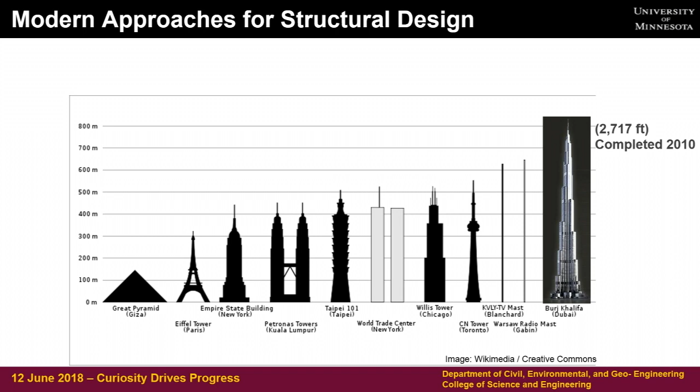And so when you look at these structures and you think about engineers, to go from these structures to this one, which is mammoth, how do you push those limits and make sure that you're going to have a safe and serviceable structure? This actually is a view from the top tower of that building, so you can get a perspective of what it's like to look down. What's coming next, though, is the Jeddah Tower. It was called the Kingdom Tower. It's in the process of being constructed.

And what's interesting is one of my former graduate students worked on the Burj Khalifa. And there were very few people who knew how tall that building was as you're working on it, because as soon as that gets out, somebody's already designing the next building to surpass it. So it was going to be a mile-high building, and the ground couldn't quite sustain that, so they're shooting for a kilometer-high building. And it's not just challenging for structural engineers, but think of the mechanical engineers, elevators, water in those structures as well.

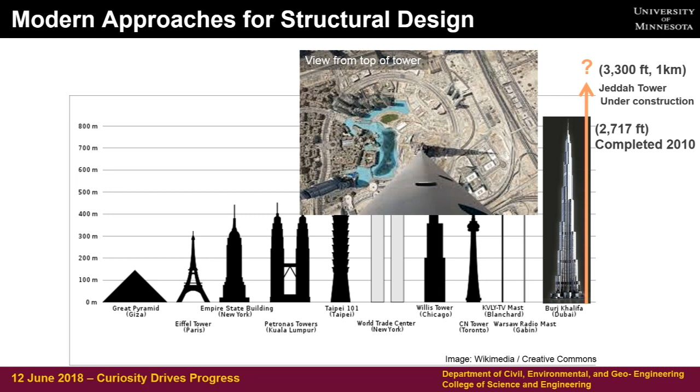So anyways, what are the modern approaches to structural engineering? These are some of the major categories. One is past experience. So we have some successful projects, learn from those. Another is to do structural and material testing. Another is to develop models, most of which we have validated with experiments. So let's look at past experience. Sometimes that doesn't work out so well. Many of you who've had physics have seen this video before.

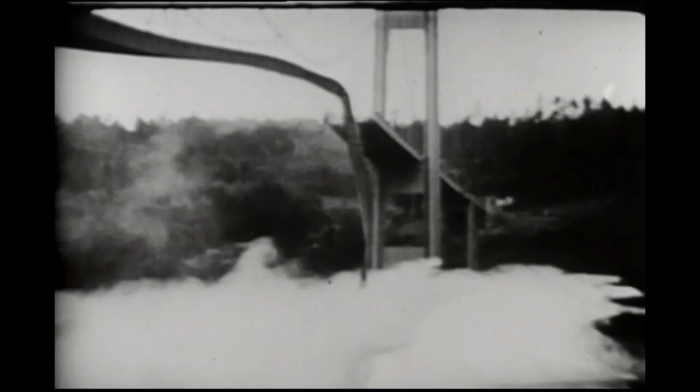But in 1940, this structure was built. It was nicknamed Galloping Gertie by those who were constructing it, and it lasted for 4 months. In a large windstorm, it excited the structure through flutter, and you can see this failure of that structural system. At that time, they were thinking of gravity loads, that you can have a long suspension span and have a very light deck. The girder depths were about 8 feet deep at that time. And you can see it was very flexible. They pushed the limits from what they learned, and it wasn't successful.

In fact, 10 years after this failed... the Golden Gate Bridge was actually built before this. There were 2 other bridges longer, but they actually ended up strengthening the Golden Gate Bridge. It had a deck as a C shape, and it's not very strong under torsion, and in a large wind event, think of about 100 miles an hour, that was starting to have some problems. So they stiffened up the deck and made it a box shape. So sometimes you retrofit structures to make them work.

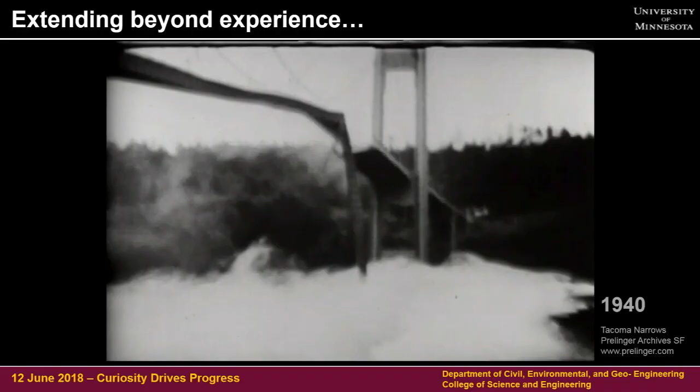In the middle, you can see a large-scale testing facility we have here on campus, the MAST Laboratory. And why is it a rendering? Because it's very hard to get a good picture inside. I'll show you some tests done in that facility in a little bit.

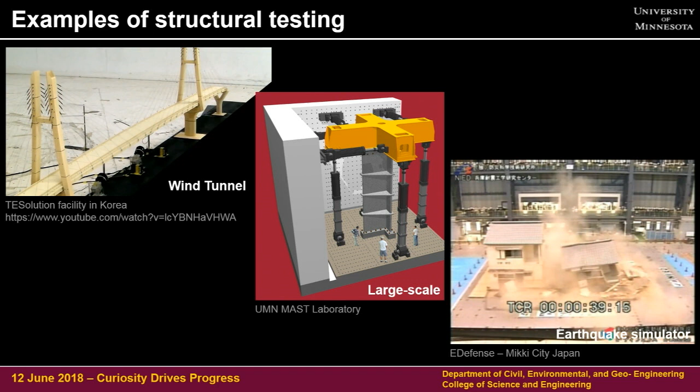The third thing that I want to show you is a shake table test. This is in Japan, and you can see it's large enough to... this has motion in all 6 degrees of freedom. Up, down, twist, yaw, in horizontal directions. And there what they were looking at is a retrofitted timber house versus one that wasn't retrofitted to see how it would perform. So you can learn a lot from experimental tests.

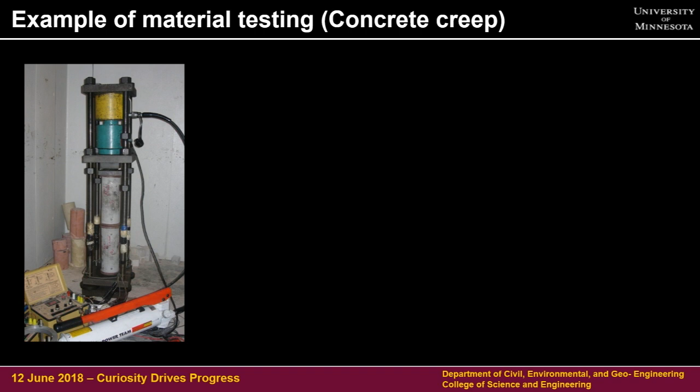In addition to that, we do material testing. This is showing concrete in a test frame. There's 2 concrete cylinders stacked on top of each other. And what we're going to do is apply load to the concrete. And I'm showing you a graph. My husband said, don't put in a graph, but I'm showing you a graph of how much this is going to deform versus time. So we're going to apply some load.

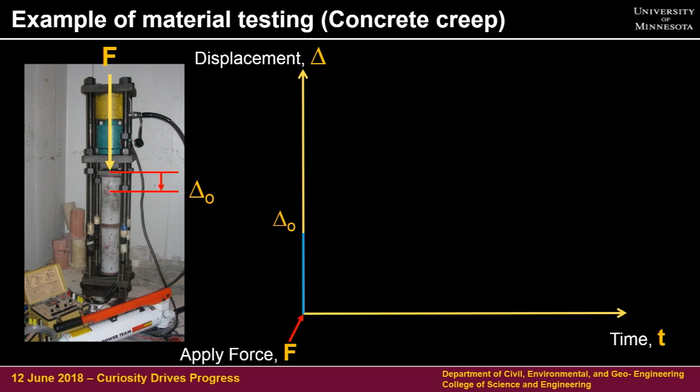So I'm going to apply a force at time 0. And here's the force that's applied, and it will immediately squish those cylinders a little bit. It's greatly exaggerated in my plot. And then if I let that force sit there and walk away, concrete has a property of creep. And so if you look at time, what happens is the concrete continues to creep. And over time, that deflection sometimes is like twice what that initial deflection is. So think of the Burj Khalifa as a concrete building, that really tall building. That's estimated to creep over time 2 feet.

Now, the first largest concrete structure was in Chicago, Water Tower Place. At the time that was constructed, they had walls and columns in that building where the columns had very high stresses. The load coming to the column, you can think of somebody's high heel as a lot of pressure, versus if you have a flat shoe in a wall, you have less pressure. Well, higher pressure causes more creep. There were estimates in the Water Tower Place that the upper floors would have a 1-foot differential if you used the same concrete in those members because one's creeping more than the other.

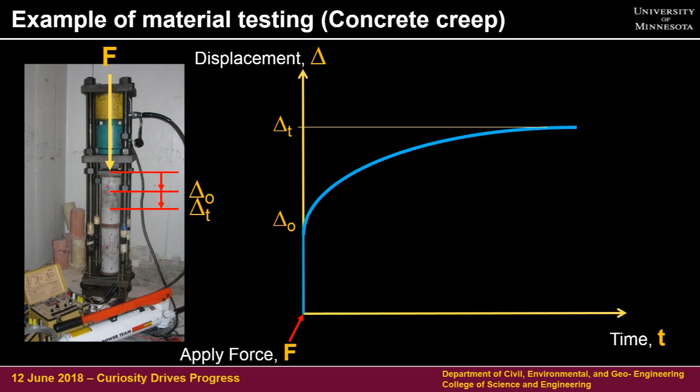So what did they use? They used different types of concrete so that the columns would creep less than if they used the same type of concrete. And the Burj Khalifa, what did they use? They used a matter of distributing the stresses so all of the elements would creep at the same amount. Challenges for those who are doing piping systems, you better accommodate those with a lot of bends and elbows. So you have to think ahead to these challenges as you push the limits. This is just showing the peak displacements.

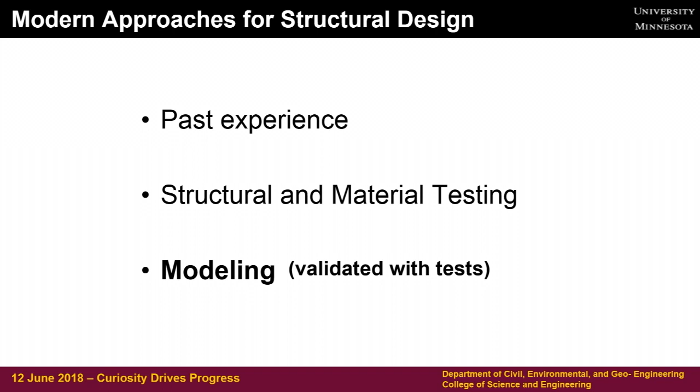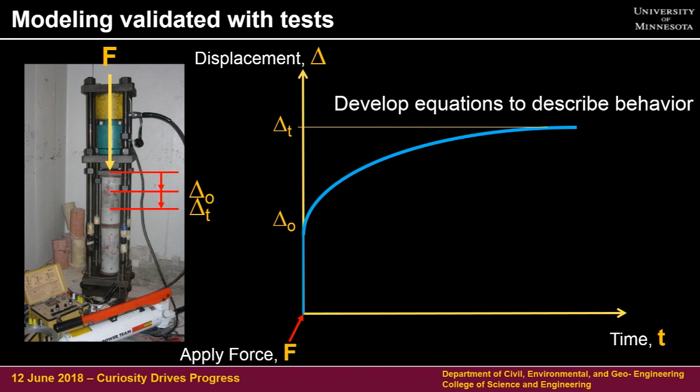The other thing is modeling. You cannot test everything that you're going to build because once you build it, it's there. So what do we do about modeling? A lot of times we do models that are validated with tests to try and extend those results. So here, if you look at this cylinder, what people can come up with are equations to try and model what's going to happen with that material over time. Well, there's a lot of variability when you look at different volumes of material versus surface ratio. A cylinder is going to have a lot more creep because of more surface area versus the 35W bridge.

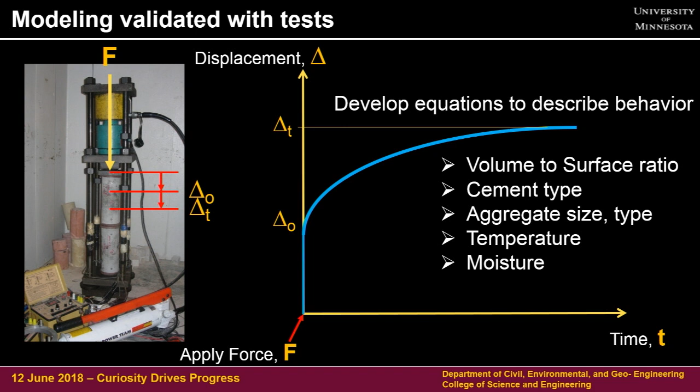It's going to take a lot longer for that to creep over time. In addition, type of cement, aggregate type, temperature, and the environment matter. Moisture will affect it—if you keep it wet, it's not going to creep. So you develop different relationships that need to include the most important parameters. We have databases shared among the community where people come up with new models and equations to try and better predict the performance.

Here's another example of modeling. This is a picture of a structure that I tested in the MAST Laboratory here with one of my students and some colleagues from additional universities. We had hundreds of instruments on it, but hundreds of instruments don't cover everything that's important. So how do I understand the behavior if I don't have instruments everywhere?

What you can do is build a model that you validate with the locations where you have instruments. Then you can use the model to explore what those critical regions are doing—stresses and things—where you don't have instruments. In addition, you cannot build a test specimen to investigate everything, so you'll do a few tests. If you have a validated model, you can make changes to it to investigate different parameters.

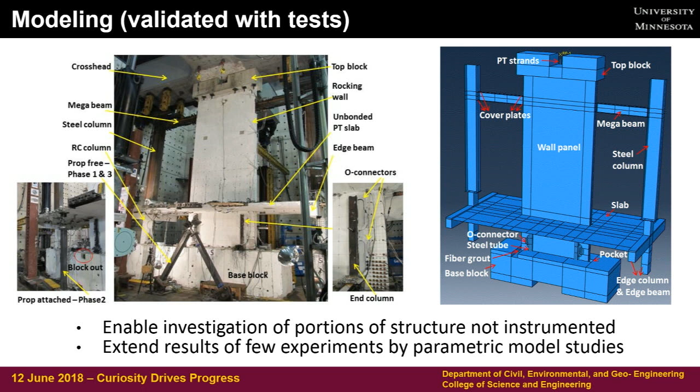What do we do for innovations in structural design? When we push structures to the limits, you can think of seismic regions as where you're really going to expect, in the life of that structure, that you're going to push it to its limits. So I'm going to talk about seismic for a little bit. Actually, the largest seismic event did happen in the mid-continental United States, in the New Madrid area back in 1811, and it had a large impact all the way up into Canada. It's a rift in the plate, so it's very difficult to predict.

It happened before there were many people living here—it caused the Mississippi River to flow backwards. But because there weren't a lot of structures back then, people ignored it. It's not until recent history that people are starting to look at earthquakes in the St. Louis, Memphis area as a design consideration.

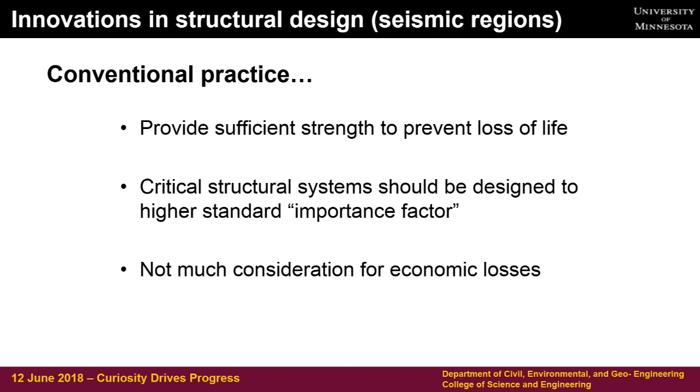If we think about seismic regions and structures, what has conventional practice been? We want life safety, we want to prevent collapse—that's number one. Number two, with a hospital, police, or other important facilities and control centers, you do not want those to be inoperable; those have got to be operable. After that, we don't care if a structure is damaged, as long as it's not one of the operations centers and people are not injured. Economically, it's easier and cheaper to build a building that you expect some damage to—more economical.

If you imagine this as a structure, in Minnesota we have gravity loads pushing down. When you have wind and earthquake, those are lateral forces. Looking at those lateral forces applied to a structure, you can see how much force it carries versus how much it deforms. If you design that structure to be elastic, it means you'd push it in one direction, release it, and it would go right back to the original position, undamaged. That costs a lot of money to design for those big forces.

If you can develop a structure that deforms, you can design it for a lower force, have less steel in the structure, and it's more economical. That means it's going to have deformation capacity—you don't want it to break, you want it to deform. The other thing is it's going to eat up or dissipate energy, which means my structure is going to be damaged.

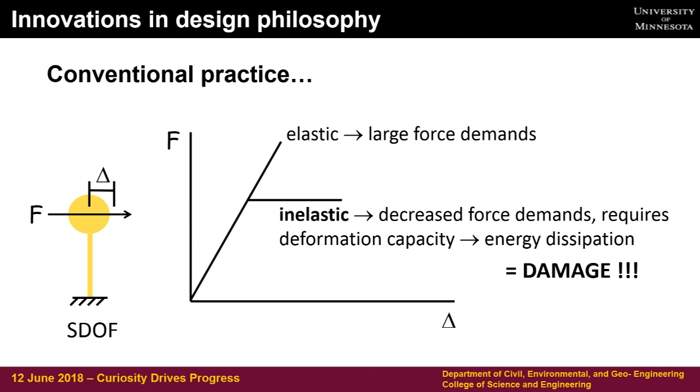And because of those hydraulic bearings, there's very little friction when you move the structure in multiple directions. So it's an incredible piece of equipment.

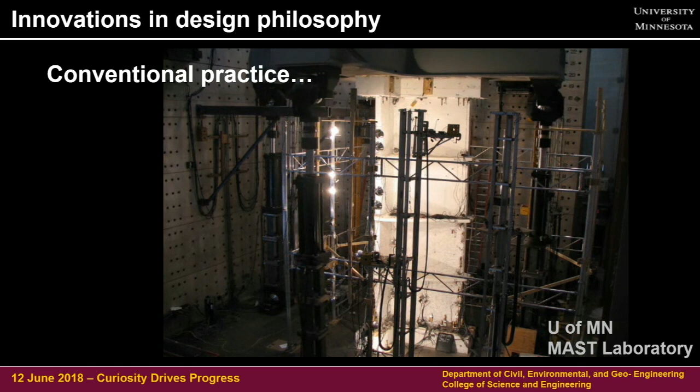Let's look at what happened to the structure designed with conventional means. This is what it looks like after that earthquake event: cracking, yielding, buckling of bars, but the building would still be standing.

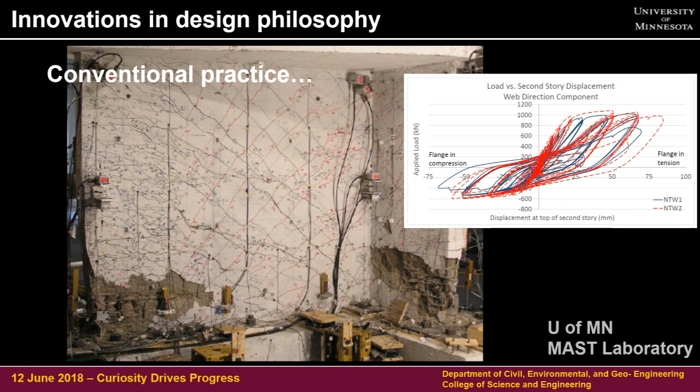This is showing the force versus deformation. As you load it, it deforms. When you release the load, it ends up offset. So these buildings would be difficult to occupy, you would have to repair them. A lot of times after earthquakes, it's very difficult to occupy them, so it has a huge economic impact.

In about the 90s is when people started to think we need a new design philosophy. That was with the Northridge Earthquake and the Great Hanshin Earthquake, where this shows the economic loss in billions of dollars, adjusted to the year 2012. This was a paper at the 15th World Conference giving this data.

And it accounts for the fact that if you can't reoccupy your building, your business isn't going to be operating. Here in the Hanshin earthquake near Kobe, that's a big export place—a lot of these cranes fell over, so it's a huge economic disaster.

Why is it more in Japan than the United States? The population is much concentrated in very earthquake-prone areas, compared to here in the United States. But this economic impact affects everyone in the United States, not just the local people.

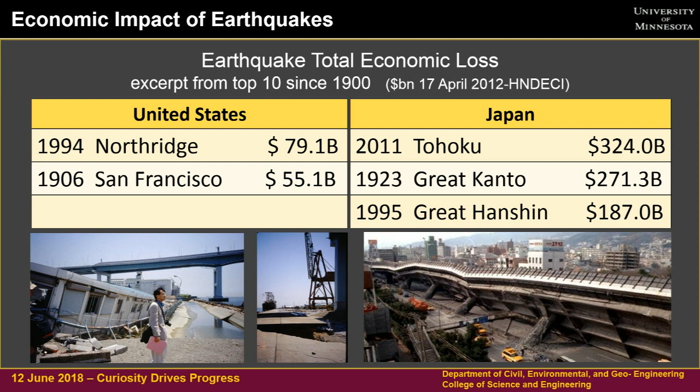So what do we have for a new design philosophy? It's called performance-based engineering. If you're building in California, you expect an earthquake multiple times through the life, so make sure it performs well. If you're designing a structure in Memphis, where the return period might be 500 years, you might not even expect an earthquake within the life, but you want to make sure it's not going to collapse if the earthquake ever does come.

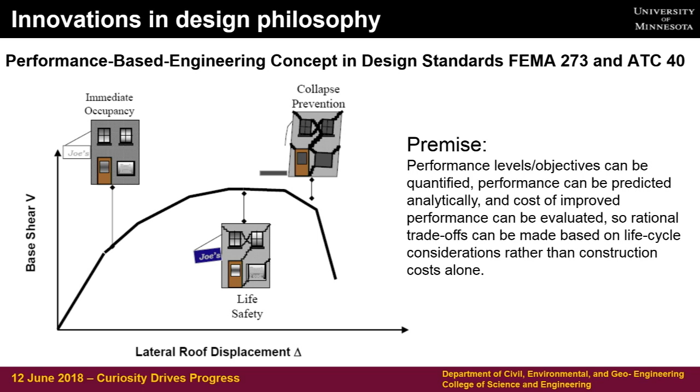The premise is that you can develop these performance levels or objectives, and rather than just looking at the first construction cost, you should think about the life cycle cost of the building you're constructing, and make a decision on which performance level you want. But to quantify these, you need testing to evaluate what sort of cracking or performance might be repairable, to fall into these different categories.

There are also innovations in design philosophy. This is showing a rendering of a test we did at our MAST laboratory, where instead of the wall system we had before, this wall is a concrete wall that has a piece of steel, like a rubber band, in a hollow tube inside.

When that wall deflects laterally, that wire in the tube stretches. And because it's not bonded, it's not going to yield—it stays elastic and wants to close that crack.

If you look at the response of that system, as that wall rocks, before it picks up it's very stiff. When it leaves the base, it gets less stiff. If you unload it, it goes right back to the original upright position. What's wrong with this? You don't see much energy dissipation.

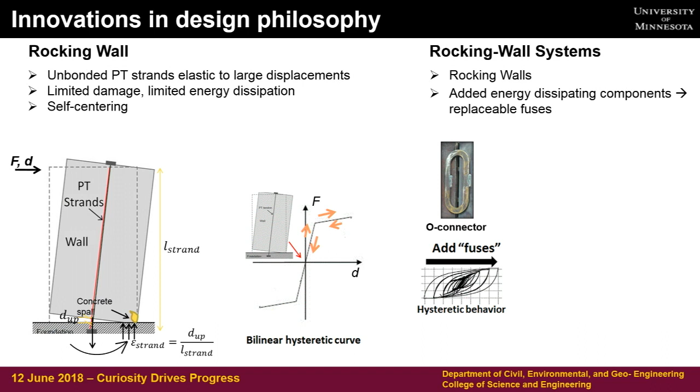So what you can do is add fuses that help dissipate energy and are replaceable. With those fuses, you can take that low deformation response and start to eat up energy for your system.

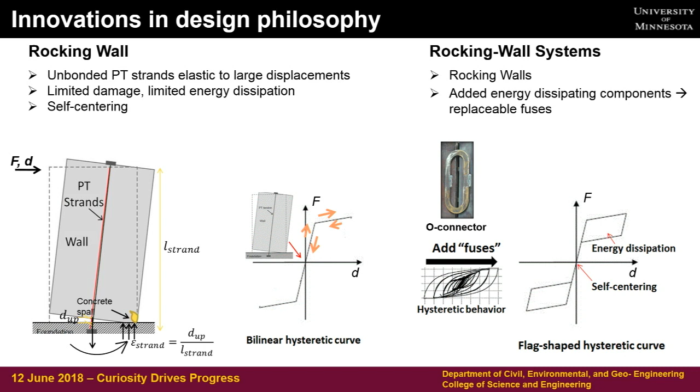So if you look at the system, this is showing my wall. Here you can see one of what we call the O connectors, attached between the wall and an adjacent column. When the wall rocks, the corner that's staying down, nothing much is happening, but here you can see this O connector is going to be very distorted—it's going to yield and stretch and eat up energy.

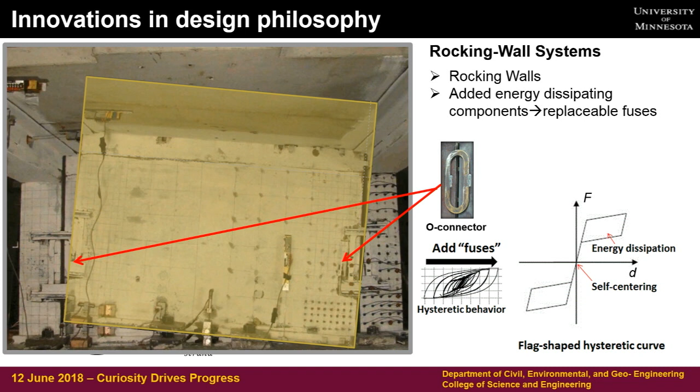So you can cycle through and see how that's working. This is showing a figure of that structure in the MAST laboratory as we test it. As the structure rocks back and forth, let me see if I can get it going again.

You'll be able to see the wall rock back and forth. You can see the floor is moving with it.

What we were interested in looking at in this investigation is how the surrounding structure impacts the ability of this building to self-center. In fact, we did another test where we developed connectors so that the floor didn't need to be picked up with the wall system.

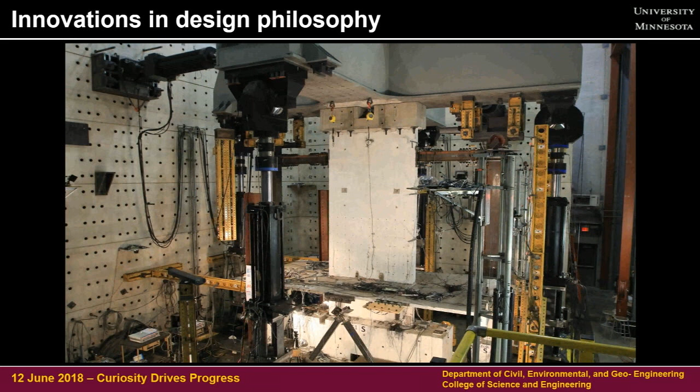So this is comparing conventional practice to that rocking wall system. You can see there's not much damage in that system, and the U connectors are all distorted. Those are the ones that eat up energy. You can replace those after the earthquake event.

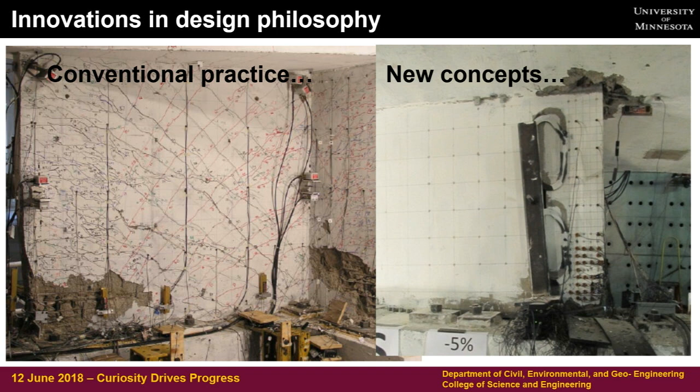You can see local damage due to the floor that was trying to be picked up and put down. But again, you can develop connectors so that you can transfer the lateral loads and have it slotted so that the wall can pick up relative to the floor.

So what are the impacts of our research? Number one, it's to be able to extend what we're learning into practice, and we do that in a number of different ways. This just shows one example that I love. We work with industry, and we work with the State Department of Transportation as an example. Working with those two together, you're definitely impacting them by putting your answers into practice.

For example, in the bridge area, you can explore the use of new materials. Why is that good? You can build longer span bridges. I love this picture, trying to get that bridge girder that's over 150 feet around that corner is pretty cool. They drive those axles separately. But you can maybe eliminate a pier, and that's a lot of cost savings. You don't need to worry about that foundation and that pier in that case.

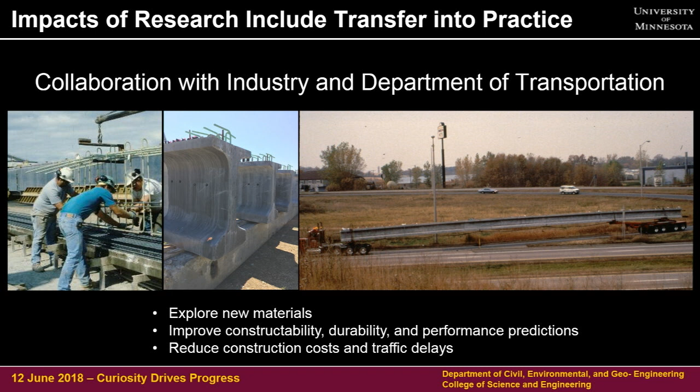You can improve constructability, looking at systems to try and reduce cracking, and also try and reduce construction costs, like with the 35W bridge, things like that.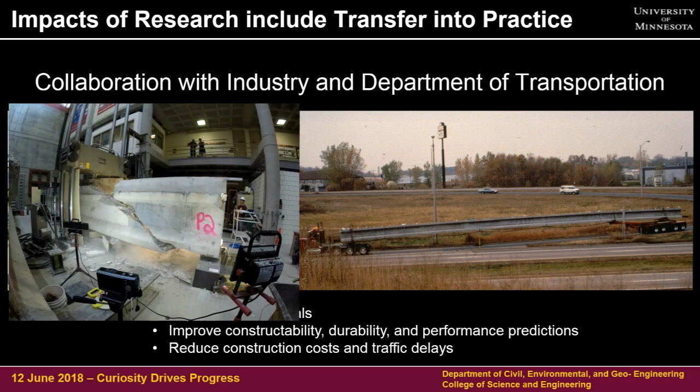This shows also something that I think is fun in our position. We can break things, as you can see, push structures to their limit. Here's a girder where they had made some adjustments, retrofitted in service, and then when that bridge girder was done, they wanted to compare how our model predicting the capacity compares to what it actually is. There's a lot of energy in those systems.

The other thing in terms of impacting practice, as Mike mentioned, is participating on building code committees. So we are the ones who can translate what we learn into code development, and that is very rewarding and fulfilling.

Not only that, having students involved—we're educating the next generation of engineers. So having them not just understand what the rules are to follow this code, but how does the structure behave, what are the mechanics of it. Getting them involved in research is probably one of the most exciting and rewarding things.

With that, I'd like to thank my colleagues in the department and some collaborators at the University, Iowa State University. And with that, I'm going to pass it on to Mike to introduce our next speaker.

So thank you, Professor French. I just must say that was solid.

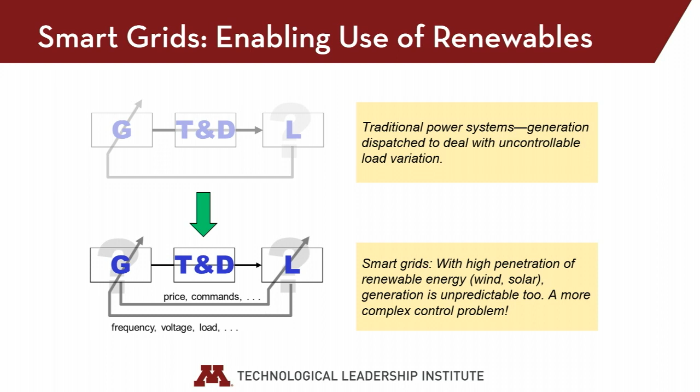So the top chart shows a traditional power system. What happens in a traditional power system? Well, with oil, gas, coal, and to some extent nuclear as well, you have control over generation. You have complete control over generation. One thing to remember whenever you talk about electricity, which is what this chart is about and most of my presentation is about, is that we have no effective, cost-efficient, scalable way of storing electricity. So in the grid, at any instant of time, all the electricity that's being generated must be consumed. Of course, this is a challenge, right? But we've addressed this challenge by being able to have controllable generation.

So on the load side, when people flip switches or businesses start equipment, whatever, right, there's consumption happening, there are effects on consumption happening. At the generation side, that effect on consumption is instantaneously being detected just through the frequency of the line voltage. And based on the detection of the frequency, generation goes up or generation goes down. So that's how we manage to keep the grid in balance, even though we don't really have control over loads, and loads are unpredictable as well. It's because we have perfect control, more or less, over generation.

What happens with renewables? Well, now we have wind and we have solar, and we do not have perfect control, and we cannot even in many cases accurately predict the generation that we will get from them.

So obviously this creates a problem, right? How are you going to keep the grid balanced? We want to have more renewables, more wind, more solar power, but the grid has to stay in balance.

The only way to achieve that is to start putting control on the load side as well. So now we have this twinned approach. There's some generation that is more or less deterministic, and some loads that are more or less deterministic, but we have to have flexibility on both sides too.

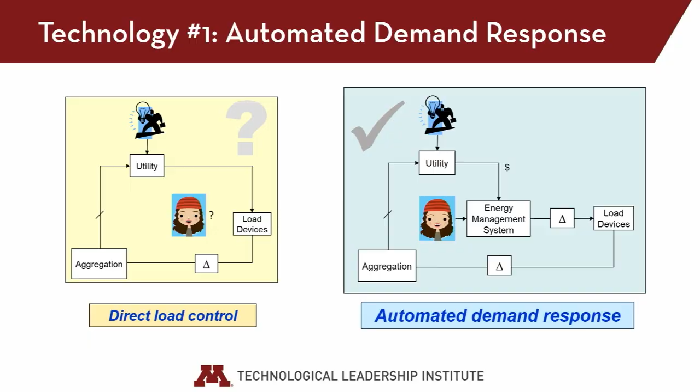Right? The University of Minnesota campus has a large number of buildings. It has many devices and loads that consume energy. It has heat and power generation facilities on site. It has some number of electric vehicles now, and in the future we'll have even more of them. And maybe in the future, the batteries of those electric vehicles will on demand be providing power back into the facility rather than just being charged. The charge and discharge capability will be there as well.

In addition, of course, the University of Minnesota campus is connected to the utility grid. And that utility grid connection is being moderated and controlled as well. And how much power you get from the utility versus how much power you generate on site is something that could be under your control.

And right now, the facility management services at a place like the University of Minnesota will be managing and controlling all of these devices, making all these decisions. They'll use dashboards, they'll use various kinds of tools. But what they aren't doing today is really doing something that could be called truly optimal in some sense. And that's really an interesting area and an exciting area of research.

And in order to do that, what do you need? Well, you need to develop mathematical models. You have to have mathematical models of all of the equipment. You have to be able to do some forecasting of the load that you are going to see over some horizon. The horizon might be the next few hours. It might be the next day. It might be over a week. You will need to be estimating some generation forecast as well based on weather patterns. You'll need information about utility pricing structures, which of course you have.

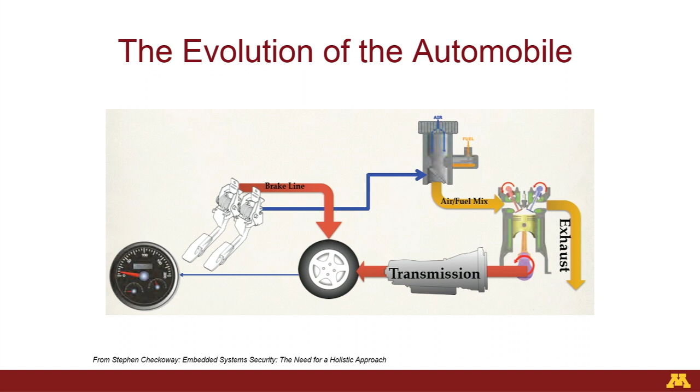I like that. Now, the same thing happened for the steering and the brakes, but if you look at a modern car, really it's more like a server farm on wheels. So you have a computer that controls the radio, the anti-lock brakes, the airbags, even getting in and out of the car, the transmission, everything, you name it. When I press on the accelerator now, a sensor picks that up, and a few bits go down the wire to another computer that controls the engine, and that computer causes more gas to enter the engine, which is great.

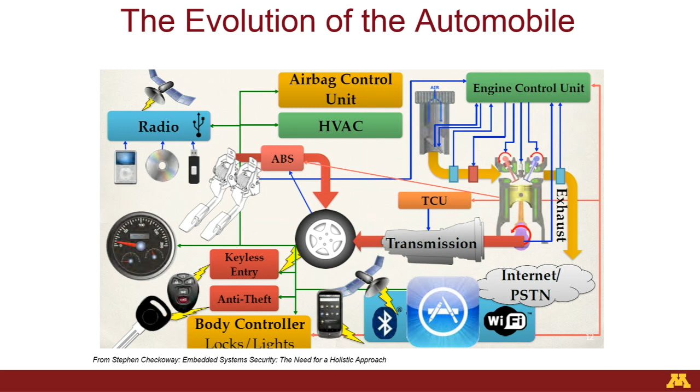I mean, there are a lot of great capabilities that come with this. When I speed up, the radio gets louder. It's like magic. When I press on the brakes, if it's icy, the anti-lock brakes come on. So this is wonderful stuff. But now it's a server room on wheels. Well, we know something about server rooms.

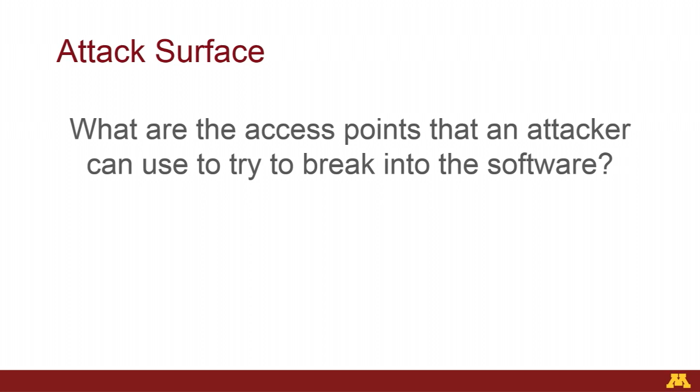What we have now is something that has what security researchers call a large attack surface. Now, this car is not an island unto itself. You have Bluetooth networks that allow it to connect to your iPod. You have OnStar that allows you to go up to a satellite or to a cellular network. And when we look at this, we have lots of different ways that attackers can get in.

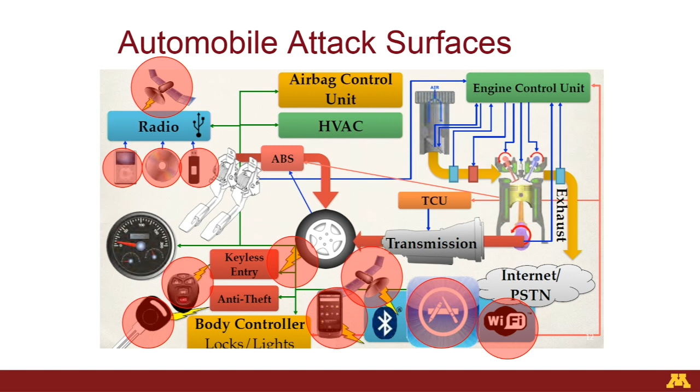So, we have auto manufacturers that are building server farms on wheels but aren't really familiar with security. We have a large attack surface. What could go wrong? And what goes wrong is exactly what Charlie Miller demonstrated. So what we want to have is trust domains. There are lots of wonderful things about having computers on cars. We're not trying to get rid of computers.

But by golly, we should be able to determine whether this is part of the critical infrastructure or whether it's a nice to have. So if I'm the brakes, when I receive commands from what I think is the brake pedal, I better be sure it's the brake pedal and not the radio, because we don't want the radio controlling the brakes. So how we do this is 3 different mechanisms.

We want to have authentication, that when I receive a command, I know who it came from. We want to have encryption, that no one can tamper with the message as it goes across the wire, and finally we want to have isolation. So if I know something is likely to be insecure, I want to wall it off from the rest of the system.

Well, if we look at the automobiles, what we see is the radio here. And the radio is running a full Linux stack. It's about 33 million lines of code. It has facilities in it for communications with OnStar, with Bluetooth. You can put your iPod or your iPhone on the dash, and it'll just recognize it. It's amazing. But there is no separation. There's no isolation of the radio from the rest of the vehicle.

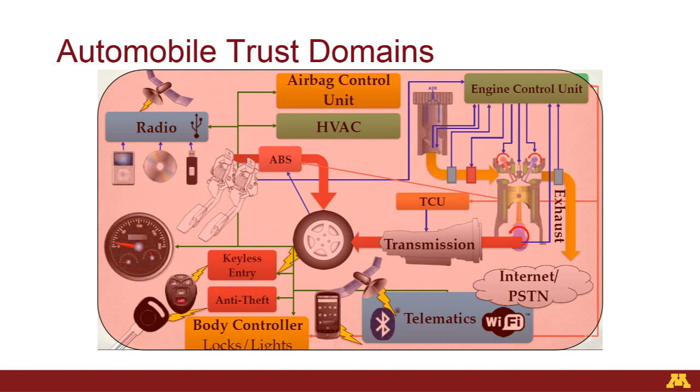So if, by chance, I'm able to sneak into the radio through OnStar or through Bluetooth, I can pretend to be the brakes or the steering, and the car will not gainsay me. And so this is how attacks happen on modern vehicles. 99% of all the literature I've seen on the subject comes in through this one silly location that's really not critical to the vehicle's performance.

And it's bad enough that we do this on commercial automobiles, but on military systems, you really want some separation. And it turns out that they're susceptible to the same kind of attacks. So this is a case in 2012 where Iran landed a brand new US stealth drone on their runway unscathed because they jammed the communications and spoofed the GPS to convince it it was over Afghanistan.

So DARPA, the Defense Advanced Research Projects Agency, has devoted a lot of resources to try and make this situation better. And this is a 32-foot Boeing autonomous helicopter called a Little Bird. Now, an attack team got into that Little Bird in 45 minutes. That Little Bird can carry weapons, it can carry troops, it can fly autonomously, and if the hackers are controlling it, not to where you want it to go.

So what we were tasked to do was to build replacement software and replacement architectures for the vehicle so that they could no longer control it. And to keep us honest, there was an attack team, the same team that broke in on the initial vehicle, that could ghost our meetings, could listen in on our phone conversations. They could get access to all our design information, all our software. And they had 3 months and virtually unlimited resources to break things.

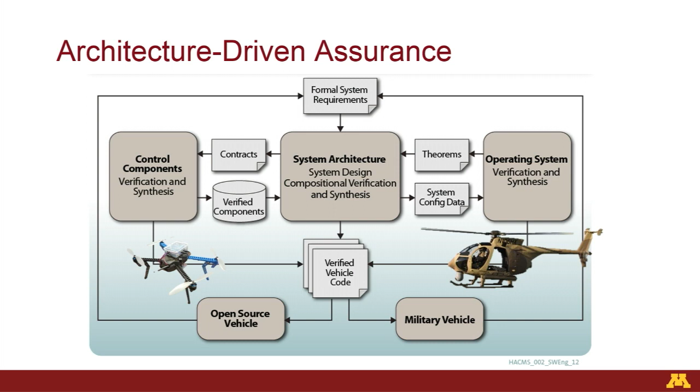And so what we proposed and what we worked on in a $20 million effort is this idea of focusing on the system architecture and focusing on software proof in order to really gain assurance of the system. This was a joint effort by the University of Minnesota, Rockwell Collins, Boeing, Galois, and Data 61. So it involves several pieces.

We have to make sure that we understand the architecture and that the critical pieces actually work the way they're intended to do. So the operating system piece—everyone's familiar with Windows. What Windows is supposed to do is wall off one process from another. And sometimes it does, and sometimes it doesn't.

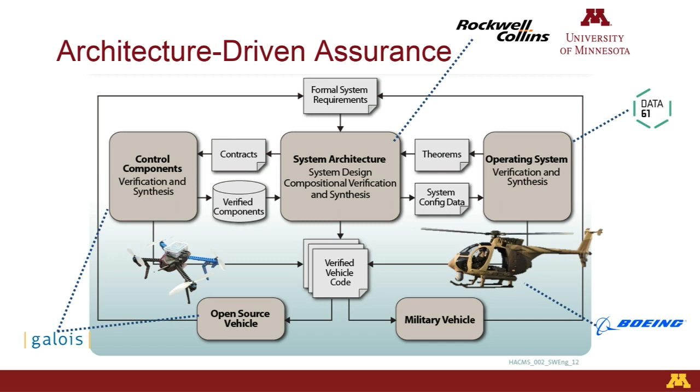And when it doesn't, we have these security problems that you hear about. So we worked with a team that actually had a proof of operating system security. And then we had another team that developed control components in such a way that they were hack-proof at compile time. So if they would compile, meaning if there was a piece of software you could deploy, then the most common kinds of attacks couldn't occur in them.

So let me show you what the architecture was. This is looking at the Little Bird. Our Little Bird radio equivalent is actually the vision system, where you can track targets on the ground, and you can choose that to set the flight path. And that is running a Linux stack with 30 million lines of code and a bunch of third-party software.

And it's not actually critical to the flight control that this works. So if you can't surveil a target, that's bad, but you can still fly home. And so we wanted to wall that off from the rest of the system. So we built some very high security components that just looked at the communications between this VM containing the camera software and the rest of the critical software.

If you think of it analogously—and we did the same thing with cars later on—we jacked up the radio software and put something underneath that says, I don't care what the radio does, but if it ever sends a message that says it's not the radio, then you want to reject it. So this is what we did.

But even given that we've architected the system correctly, software testing is hard. It's like banging your head against a wall. And what's worse is it's inherently hard. The problem with software testing is that unlike most engineering disciplines where you have some continuity to help you with testing, you don't have that with software.

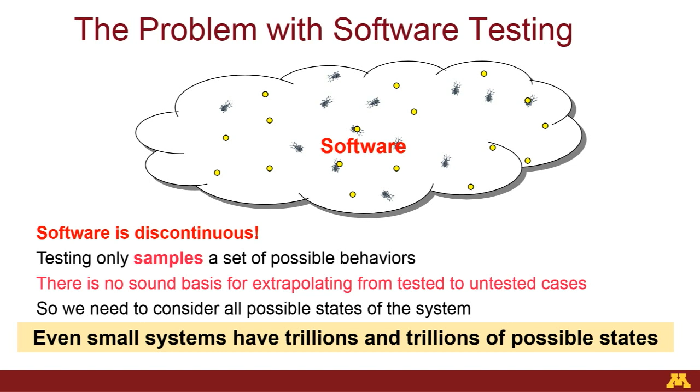So we think of software as being a cloud. We make bugs, we make mistakes at different points. And when we run tests, there are these little points, 1,000 points of light. Well, you can run a million points of light—it doesn't matter, because even small software systems have trillions and trillions of possible states. So you need to step back. Software testing is good, and we do it rigorously, but we really need something stronger. And so what we've been working on for the last 20 years, at the University of Minnesota and places like Honeywell and Rockwell Collins, is the application of formal methods of proof to software.

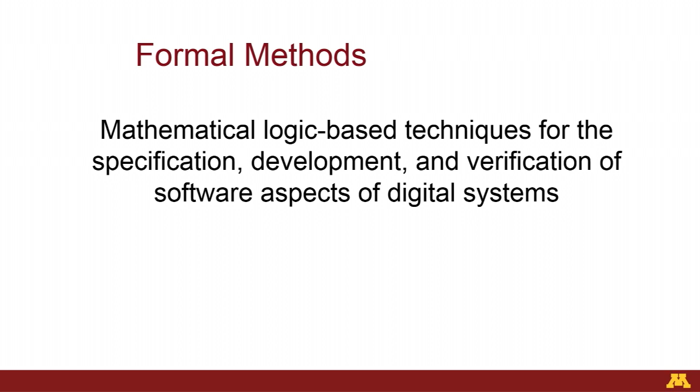So software is no different than any other piece of math. It has a lot more cases, usually. But you can apply the same proof techniques that you would do in any mathematics course on software, because ultimately it is a formal object.

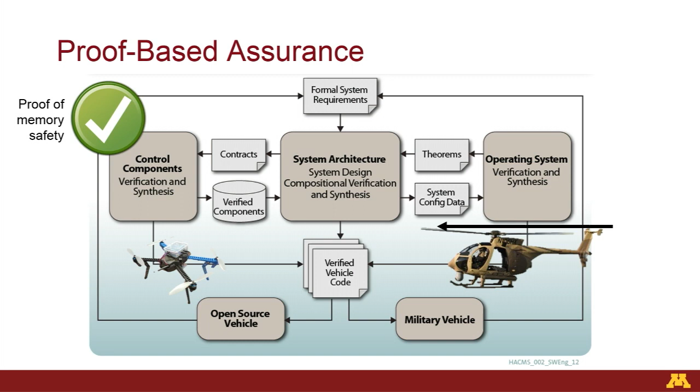So in our approach, we had proofs of memory safety. These are the ways that people usually sneak in for the critical control components. We had proofs of partitioning, meaning that the operating system always does what it's supposed to. And the part that the University of Minnesota focused on was the system architectural proofs. So given that you have these proofs of software components and the operating system, how can you scale that to say something reasonable about the entire system?

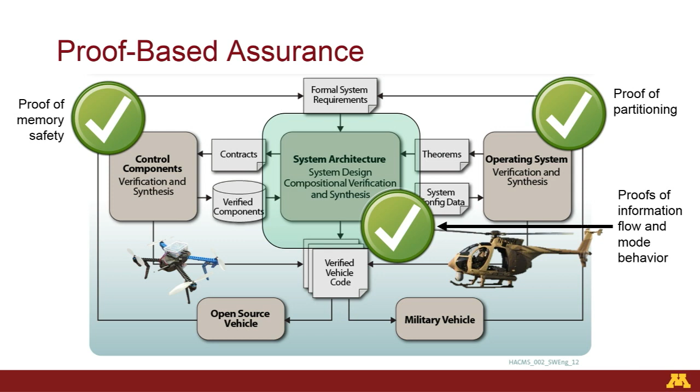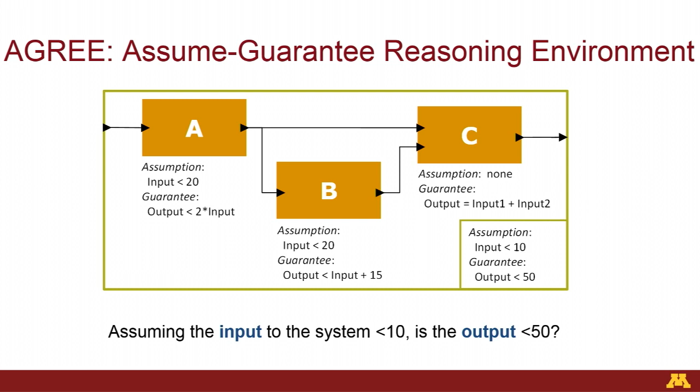Now imagine this at scale. So when we did this work on a medical device, or when we did this on the DARPA project, we were looking at hundreds of requirements in giant contracts. And the proofs ran for hours, but this is actually a big improvement over not running at all. And it wouldn't matter if, at the end of the day, we could just do the proofs.

So what's the impact? Well, the impact is it worked great. We were able to keep the red team entirely out. They had access to all of our information. They had 3 months, and essentially a team of 6 people who had world-class experience, and they were not able to get in. This was entirely unexpected — DARPA thought that perhaps we could keep the red team out for a week or two, and that would be a success. But it was entirely on a different scale.

And the good news is that math still works. When you apply proof to software, it works just as well as it does for materials or anything else. We had 3 phases, and in each phase we secured more of the vehicle. By the end of the phase, we had most of the vehicle secured, and for those surfaces, no vulnerabilities were found. So this was a big deal.